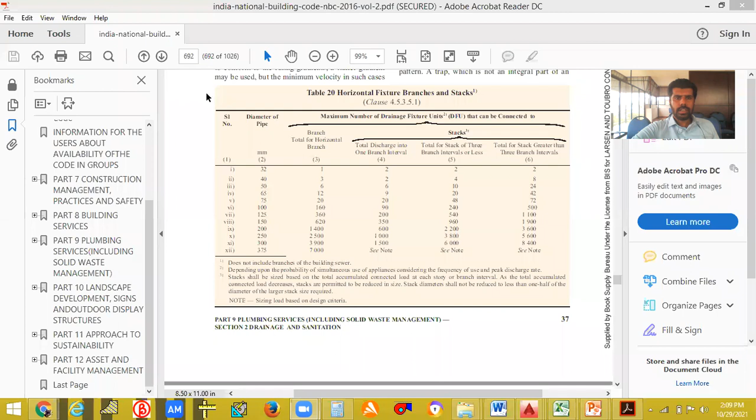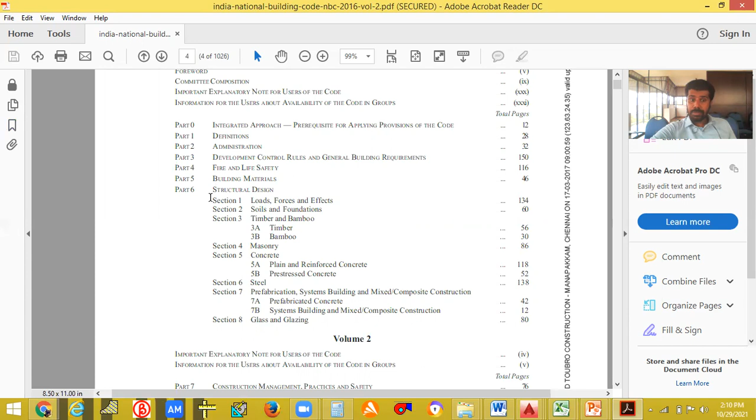So this is the National Building Code of India, 2016. In this, we have different contents in which there are part 1, part 2, part 3. Part 1 has definitions, administration, development control rules. Part 4 comes as fire and safety. Part 5 comes as building materials. Part 6 is structural design. All this comes in NBC only.

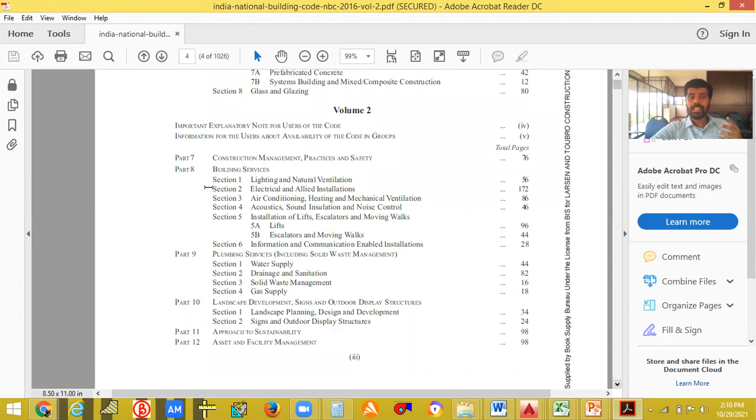Part 7 is the construction management. Part 8 is the building services like lighting, electrical, air conditioning installation. And the plumbing system comes as part 9. So when we are dealing with NSPC, National Standard Plumbing Code, that code is being taken from NBC itself only. You understood what I am saying?

So all this water supply, drainage, solid waste and gas, all those things which come under plumbing services are taken from NBC itself. But when we are dealing with a code particularly for plumbing, we could say NSPC. Not only NSPC, we can use NBC directly, or IPC also. We have already seen 3 different methods for water supply pipe sizing: WSFU method, loading unit method, and Plumbo-Stat method. You can use those methods for finding out the pipe sizes. That won't be rejected, because we are following a rule in India itself.

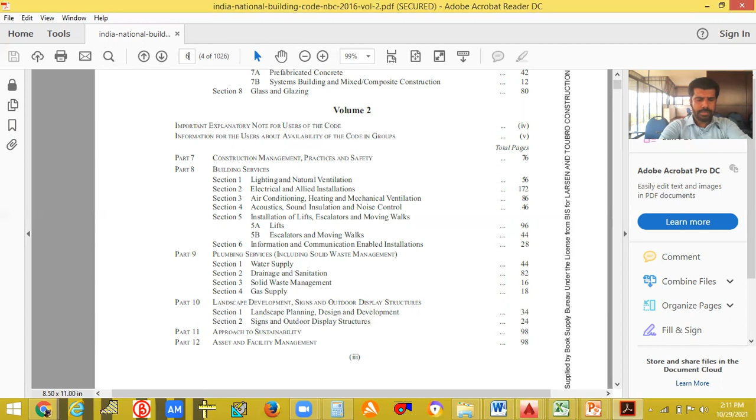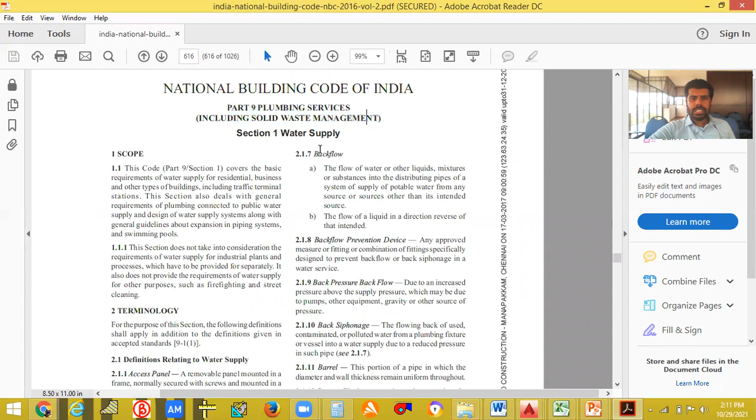And with respect to NBC, the WSFU fixture unit we have taken is directly taken from NBC only. For example, this plumbing service is page number 612, I think. One second. We are doing projects, so we know it. This is the National Building Code of India, plumbing services, water supply, and regarding the WSFU, to let you know that we have taken the correct way for designing.

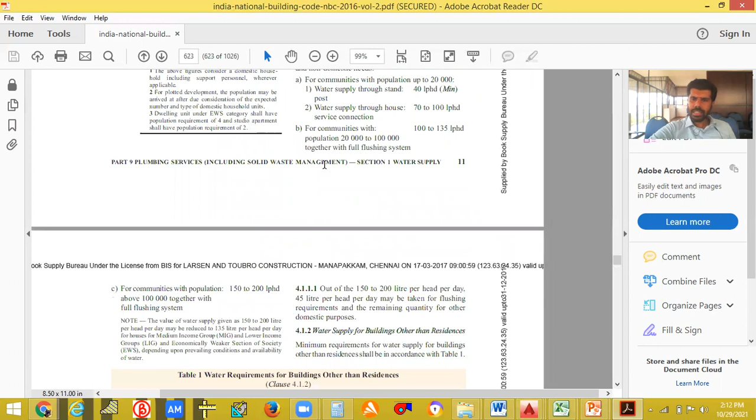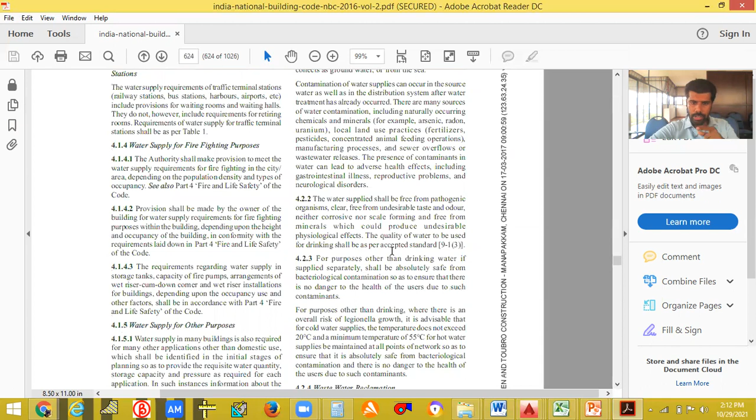Now from here only I have taken that screenshot to show you the water requirements, how many liters per day are used. Residence is not given here, only other than residence. But you can see here for domestic it is 90 liters per day, and for flushing it is 45 liters per head, so total it will be 135. We have taken 100 because it is said here we can take 100. So with respect to this liters per head, we have already calculated the overhead tank capacity.

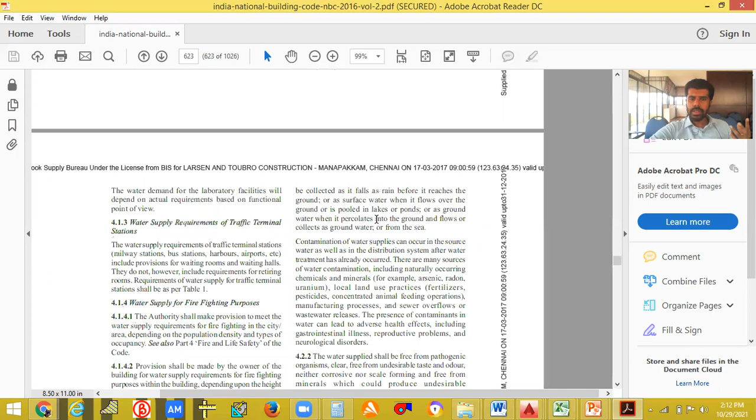Not only that, the WSFU also we have directly taken from this NBC only. And yesterday we have seen a problem regarding the water closets, how many liters is being used by the flush. It's already written here. You can see here, for water closet, the maximum flow rate is 6 liter per flush. Understood? When we are doing that, we will be getting the answer.

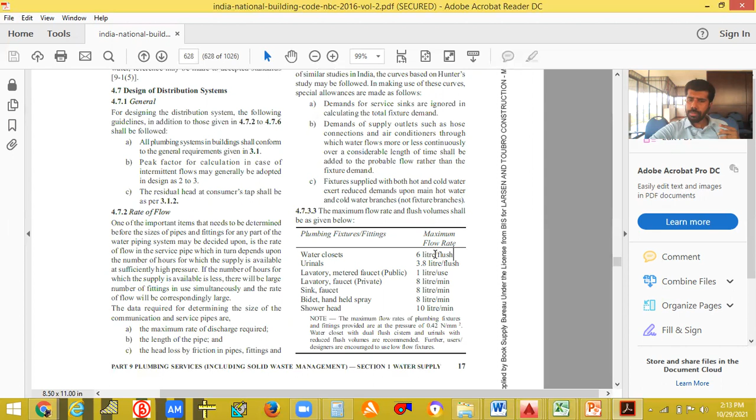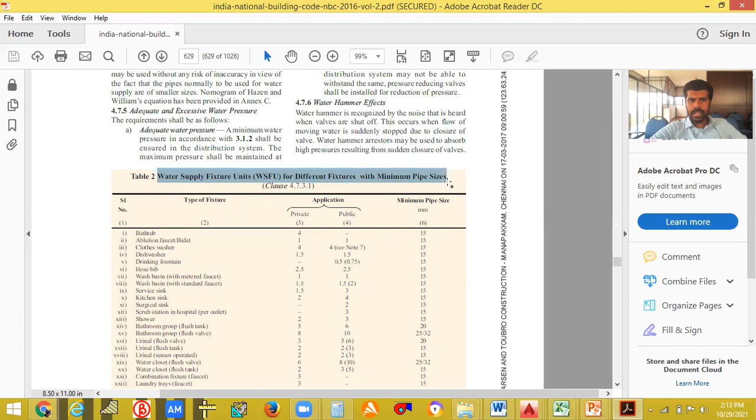And regarding this WSFU, we can see here water supply fixture units, WSFU, for different fixtures with minimum pipe size. This is from NBC only. You can see here bathtub, for a private application, WSFU is 4. We have taken 4, right? And for wash basin and for water closet, you can see we have taken the same WSFU only. So this WSFU only we have calculated and we have found the pipe size.

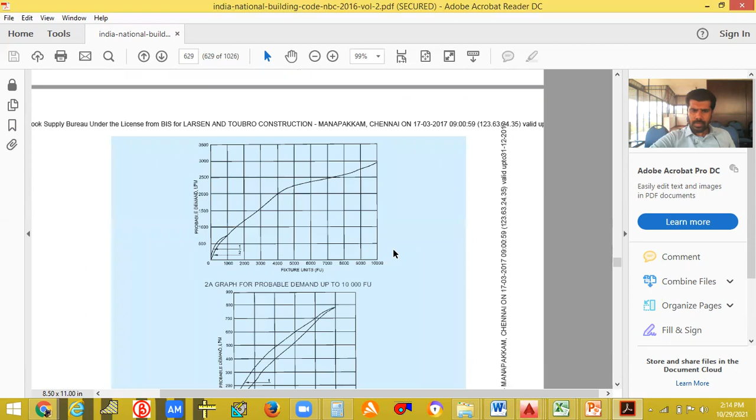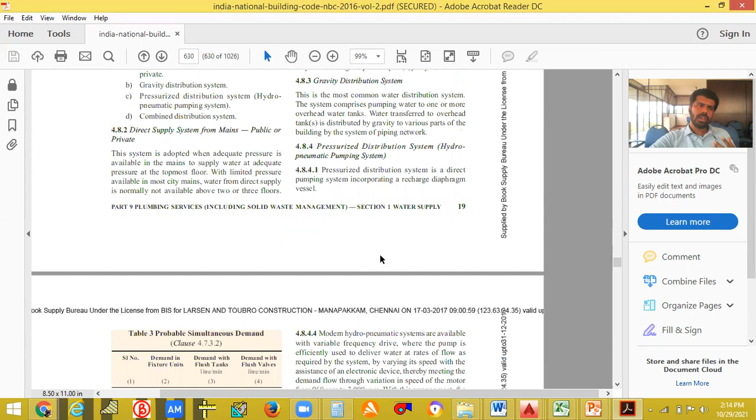And I have already said that the minimum pipe size will be, you can see here, 15 mm. Minimum pipe size given by the NBC is 15 mm, and this 15 mm only we are also doing. So all these things we have taken from that NBC itself only. We are just going with this water supply only. We haven't come into drainage. That's why I have just focused on this water supply.

We can see that WSFU, this chart only we have taken. Water for ablution, it is 1. Clothes washers, it is 4. With respect to this WSFU only, we have found out the GPM. With that GPM only we have found out the pipe sizes. So if you want, we can just compare with the NBC and see what the difference is.

With respect to NBC itself we are moving forward, but it is not necessary that everything should be specified like NBC. You can take NS, you can take ASPE also. You can take NSPC, which means National Standard Plumbing Code. All those things will be taken from these individual standards only. With that respect, we won't reject. So whatever we have done, it is proper. So we have to follow these things, minimum 15.

So I have given this 15 mm pipe size. But in practical sense, the contractors won't give 15 mm. They will directly give 20 mm only, as a safety factor. So as the design, it says for the individual fixtures we have to give a minimum pipe size of 15 mm. As a design, we can give 15 mm also. That's correct. That is fine.

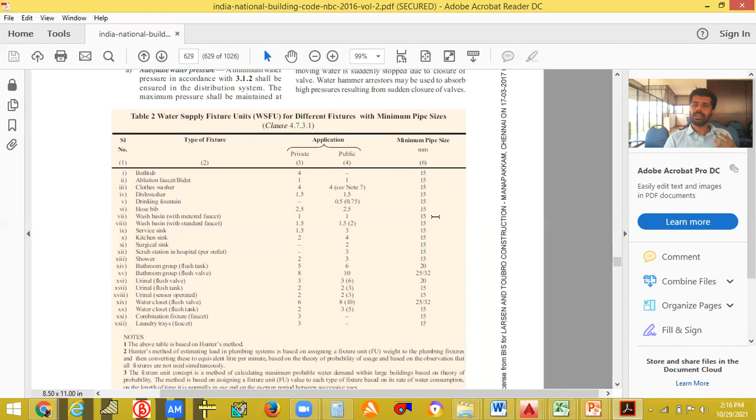Totally fine. But in a practical sense, if as a consultant I am saying you have to give 15 mm only, they will give only 15 mm. But still, as a safety factor, we can give minimum 20 mm. Nowadays, 15 mm is not given as the minimum pipe size. Though 15 mm is required, still we give 20 mm as the minimum pipe size. So all these things are there in the NBC only. This is the NBC chart.

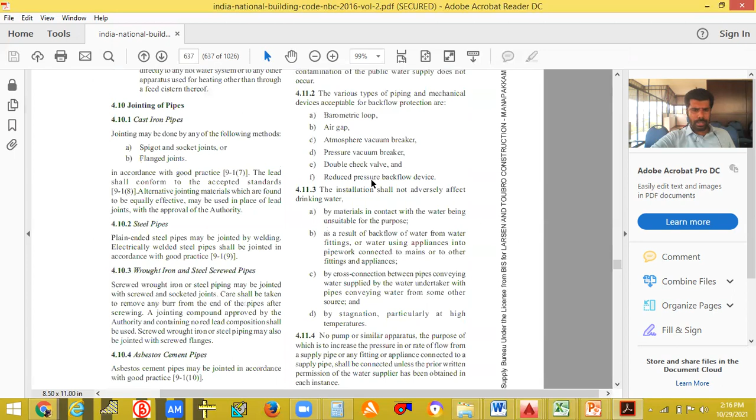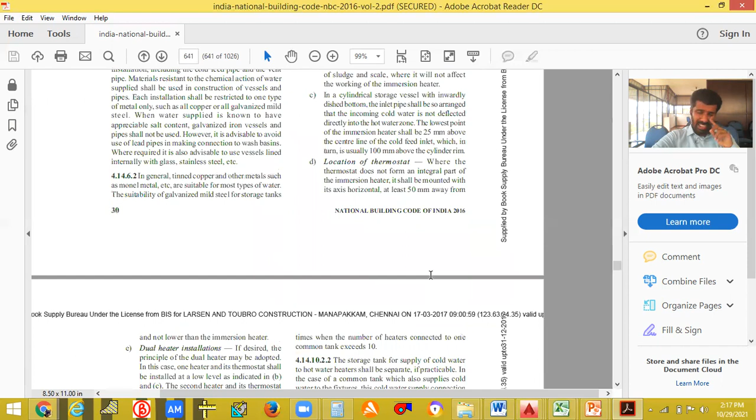Not only that, the point I am trying to say is that all those values and codes will be taken from this NBC itself only. But as a local code, you can name it as NSPC or IPC or something like that, for that particular place. But as a designing part, everything will be perfect only. Otherwise we won't get approval.

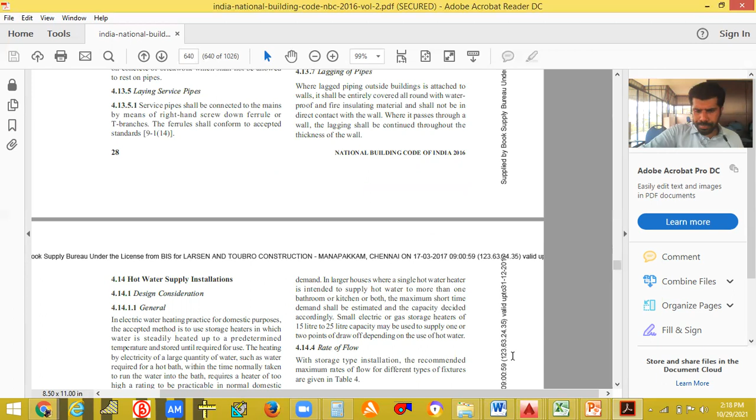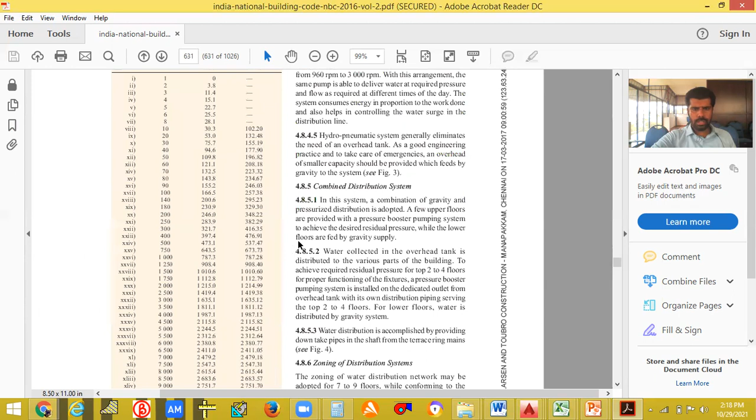So I think it is clear for you, because for this water supply we have taken the same values only. So there won't be any difference. And the minimum pipe size is this much only. So I think that is clear for you.

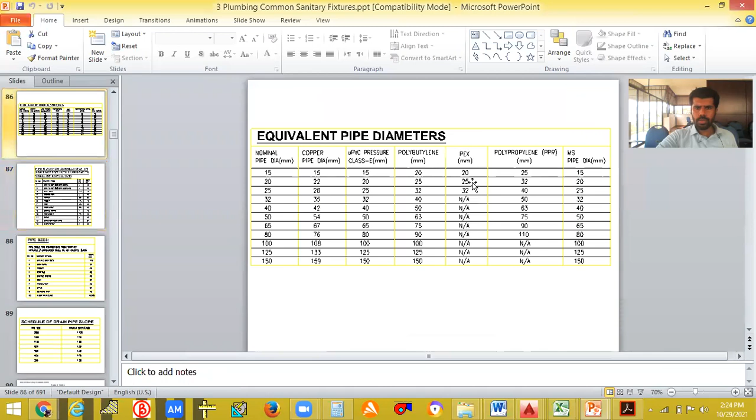I have already taught you about this thing only, so I'll share that once more, coming back to my initial class. Listen properly - this I have already taken in the initial classes, about minimum pipe, equivalent pipe diameters, and all those things.

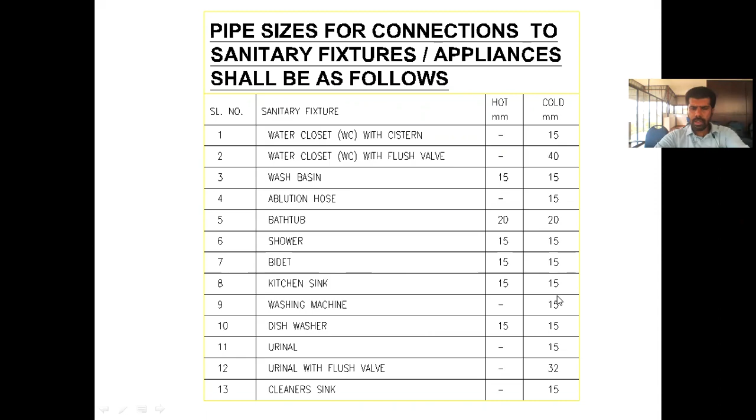This is the water closet minimum pipe diameter shown here. With cistern, it is 15 mm. Wash basin 15 mm, ablution hose 15 mm, bathtub 20, shower 15, bidet 15, kitchen sink 15. So all these things are 15 only - that's what I have already shown you in the NBC. Minimum pipe size is 15, 15, 15.

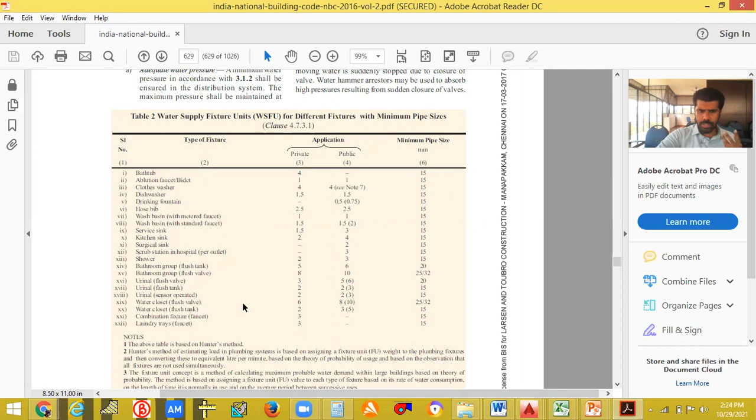When it comes to these, all those things will be 15 only. Water closet will be different depending upon the type - if it's a cistern or a valve, you have to use larger pipe sizes. So there won't be much difference like this, it's just what I have shown you.

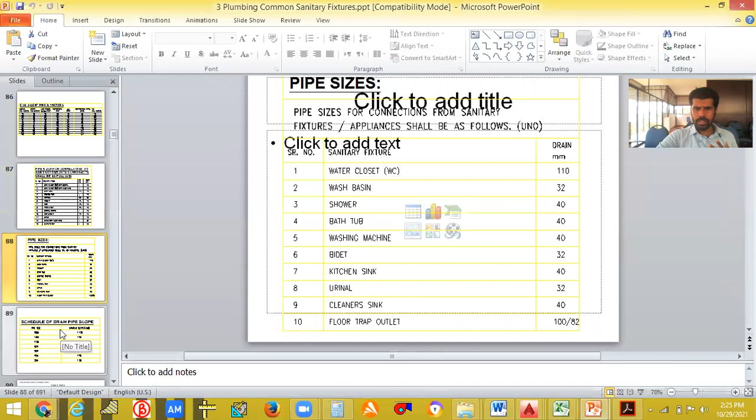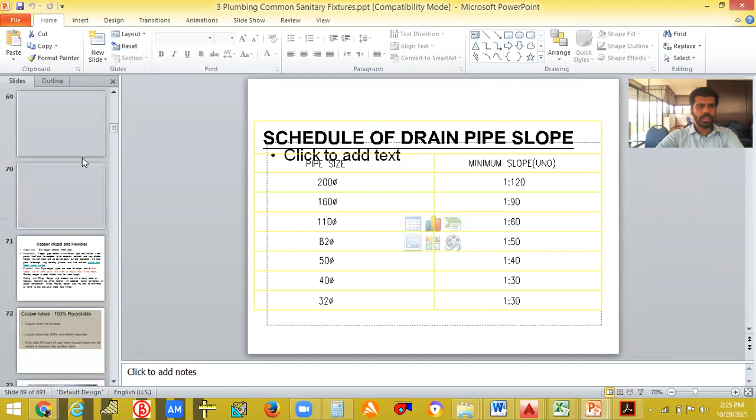And all these things I have shown you - this comes in a drain only. Okay, all these things I have shown you. Now coming to this, this was the pipe diameter we have already taken.

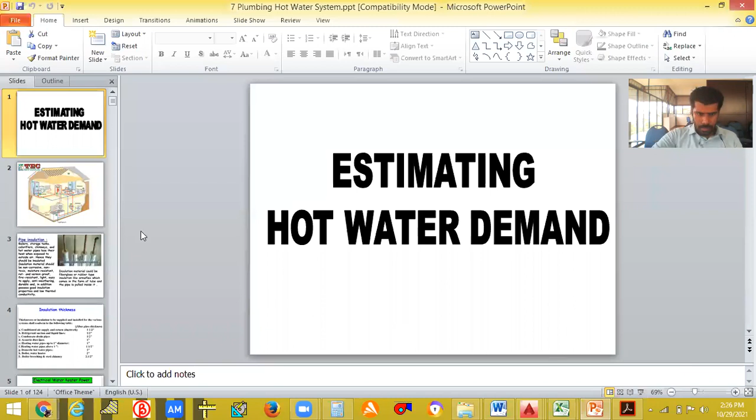So today we are going to deal with hot water system only. I will share my screen regarding the hot water system. In any building, we need hot water as well as cold water. It is mandatory.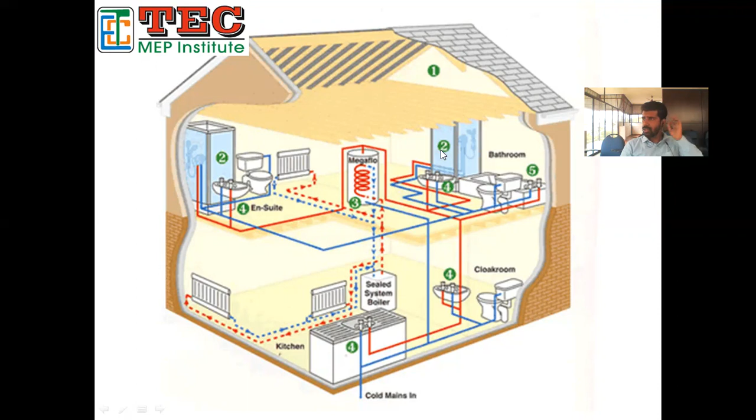So in order to avoid that, if the length is more than the recommended amount, like more than 100 feet, we have to give a recirculation pump so we can maintain hot water continuously throughout that pipe. So insulation is important.

This is generally said: pipe insulation depends upon the insulation itself. Boilers, storage tanks, calorifiers, chimneys, and hot water pipes lose their heat when exposed to outside air, hence they should be insulated. Insulation material should be non-corrosive, non-toxic, moisture-resistant, rot and vermin proof, fire resistant, light, easy to apply, anti-weathering, durable, and in addition possess good insulation properties and low thermal conductivity.

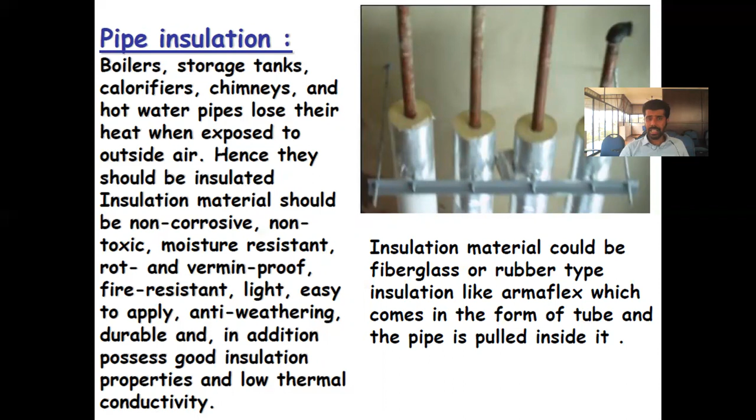So insulation material could be fiberglass or rubber type insulation like Armaflex, which comes in the form of a tube, and the pipe is pulled inside it. Normally the insulation material will be fiberglass or nitrile rubber type insulation, like Armaflex. It's just a general thing.

Let's see a general thickness, how much thickness should be given if you're using fiberglass material. The thickness of insulation to be supplied and installed for the various systems shall conform to the following table. First, for conditioned air supply and return ductwork, you can give 1.5 inch fiberglass thickness material.

For refrigerant suction and liquid piping, you can have half inch. Condensate drain pipe, half inch. Acoustic duct liner, 1 inch. Heating water pipes up to 1 inch diameter, here dealing with heating water pipes, you can have 1 inch. Heating water pipes above 1 inch diameter, 1.5 inch.

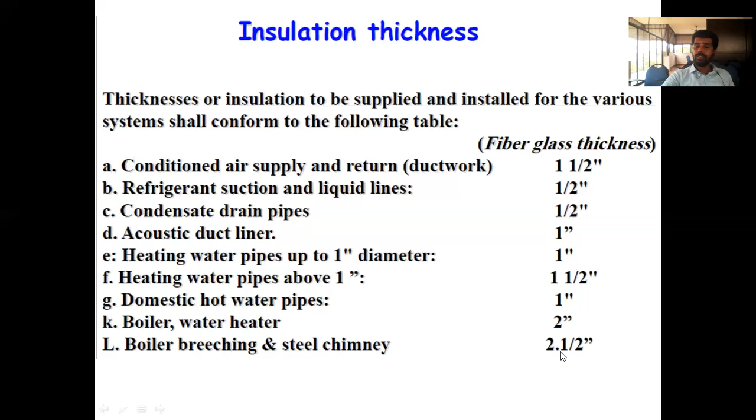And domestic hot water pipes, you can have 1 inch thickness as insulation. For boiler and water heater, you can have 2 inch. For boiler breeching and steel chimney etc., you can have 2.5 inch thickness. These are the general insulation thicknesses.

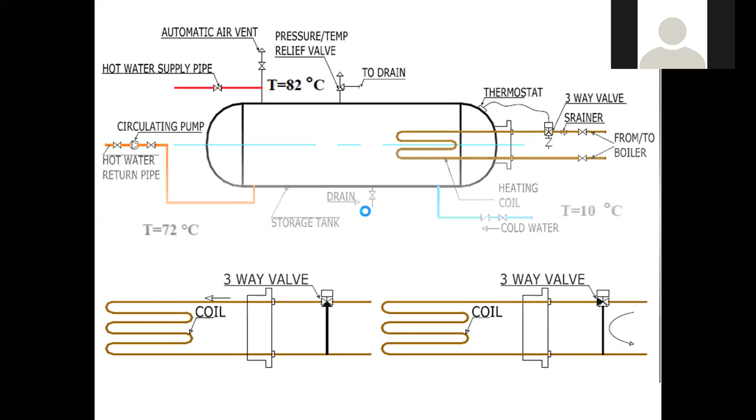Now, hot water system, I am just giving an introduction. Finally, we'll be doing a problem, and by that problem we can know the total water capacity that we need as well as the heating capacity that we need. Coming to the introduction, I am just dictating this because there is nothing much to explain. Since we are dealing with hot water, the main focus for design is to find out the pipe diameter, which we can easily know by using the WSFU method.

And I have already said that the WSFU method will be taking only 75% of the fixture unit. And when coming to the hot water system, we have to find out the heater heating capacity as well as the storage tank capacity. These are the main criteria in the hot water system.

Another concern is to give the recirculation pipe. These are the main things which come in the hot water system, and then we have to do the installations. That is another thing. So anyway, I will detail this introduction.

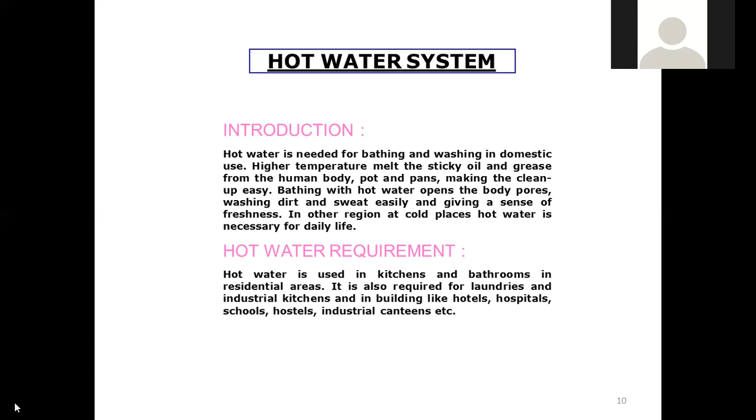So mainly we'll be focusing on the hot water system. What should be our main aim? In residential, mainly three areas we will be using it: the wash basin, the shower, and the kitchen sink. If you are trying to use hot water for washing, we can give one hot water supply for washing the clothes also. That is also needed. These things we have already discussed.

The temperature of the hot water. This I have taken from the NBC only. If you have any doubt, I will just show you. The design of the hot water supply system and its appliances shall be based upon the following temperatures in accordance with IS 755 standard. Scalding 65 degrees; it shows different temperature ranges. I will just show you from the NBC itself.

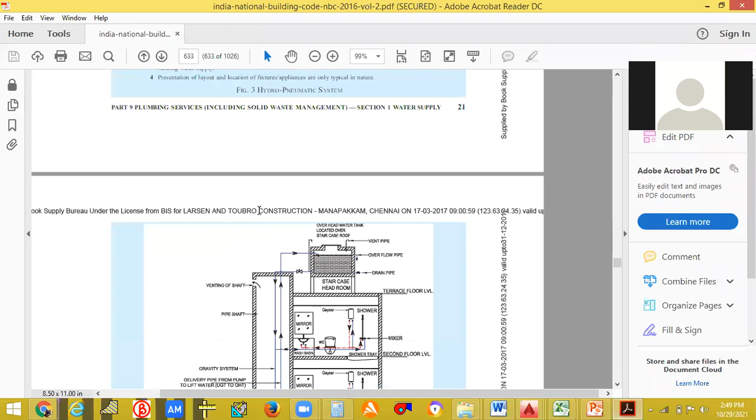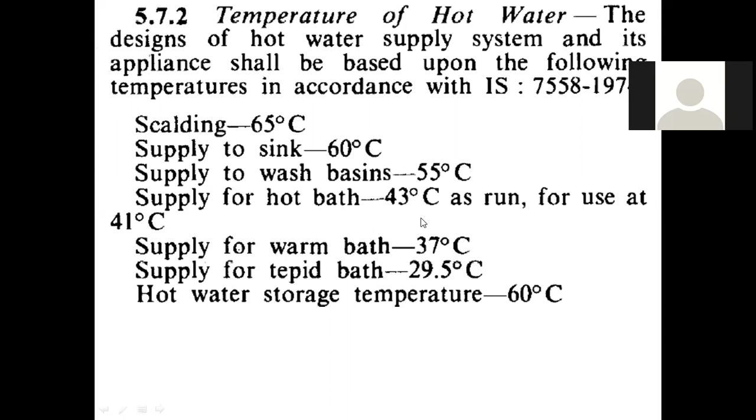Now, systems of hot water supply. There are two systems of hot water supply: the instantaneous system and the storage system. Normally, there are two types of heaters or two systems. One will be the instantaneous system, and the other will be the storage system. So, as a designer, where to give storage and where to give the instantaneous system, that we can see.

In the instantaneous system, the water is heated at the moment it is needed. That's why it is called instantaneous. If you want hot water right now, you can use the instantaneous system, and you will be getting hot water instantly without waiting. At the moment it is needed means when you need hot water, at that time it will start to heat it.

In the storage system, a tank full of hot water is maintained in readiness. The hot water will always be stored, so when you open the valve, within seconds you'll be getting hot water, because it is already stored inside. But in the instantaneous system, it heats when you need it. So depending upon one thing, instantaneous would be better.

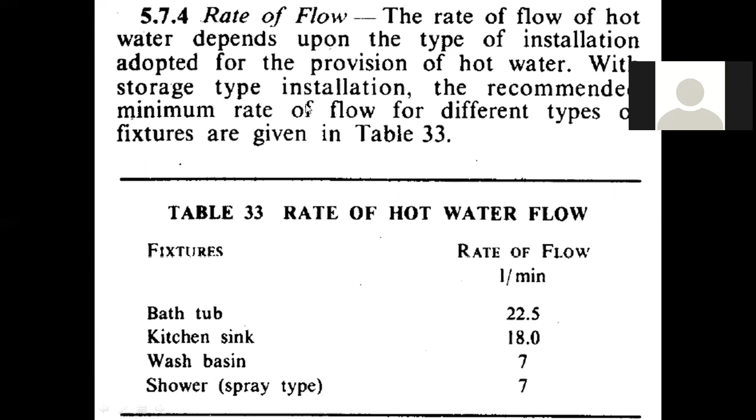So this is given. Bathtub, it is 22.5 liters per minute, kitchen sink 18, wash basin 7, shower 7. In that case, we have seen 5 only. Now here it is shown as 18. 5.7.4. So here it is given as with the storage type installation, the recommended maximum rates of flow on different types of fixtures are given in table 4. Now it has been reduced to this much, so it might be the minimum one.

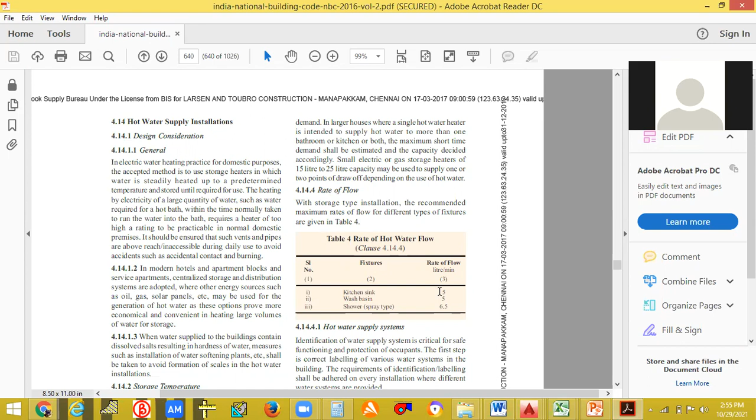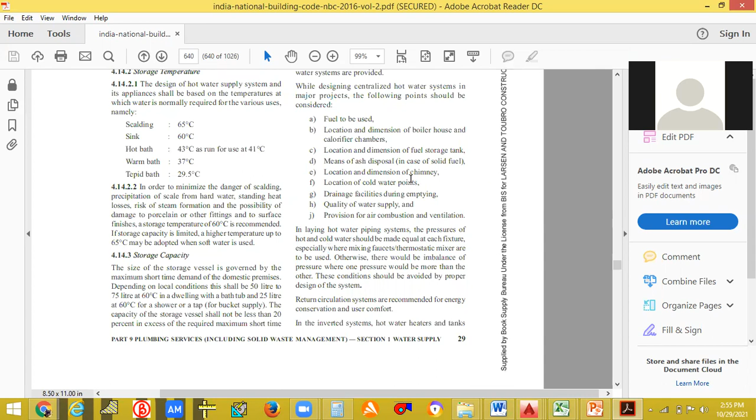5, 5, 5. I have seen showers need something like 7 to 10 liters per minute, 6.5. They have written as 7. So if you are choosing NBC, if you are choosing 5 also, it's acceptable, and all these things are taken from this itself. But it is a minimum flow rate. Kitchen sink it is 5, wash basin 5, shower 6.5. If you are taking larger values as a safety, you can keep that. That's all about the rate of hot water.

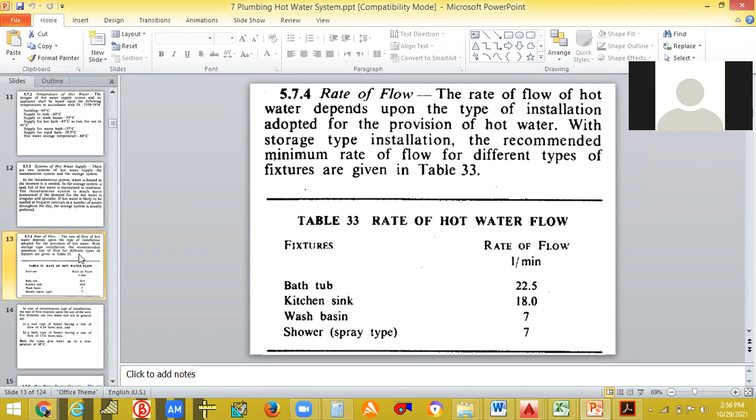Now, here we were dealing with the rate of hot water depending upon the storage type installation. In case of an instantaneous type of installation, the rate of flow depends upon the size of the unit. So it will differ according to the size of the unit. For domestic use, 2 main sizes are in general use.

One is a sink type of heater having a rate of 4.54, which is coming closer to 5 liters per minute, and the bath type heater having a rate of 13.6 liters per minute. If you are using the instantaneous type, you have to follow this one. Both the types give water up to a temperature of 60 degrees Celsius. So normally that will be the temperature.

Now hot water storage capacity. The size of the storage vessel is governed by the maximum short time demand of the domestic or industrial premises. Depending on the local condition, this shall be 50 to 75 liters, which means that the hot water storage capacity depends upon the demand of the water for domestic purposes.

So depending on the local conditions, this shall be 50 to 75 liters at 60 degrees Celsius in a dwelling with a bathtub, and 25 liters at 60 degrees Celsius for a shower, or a tap for a bucket supply.

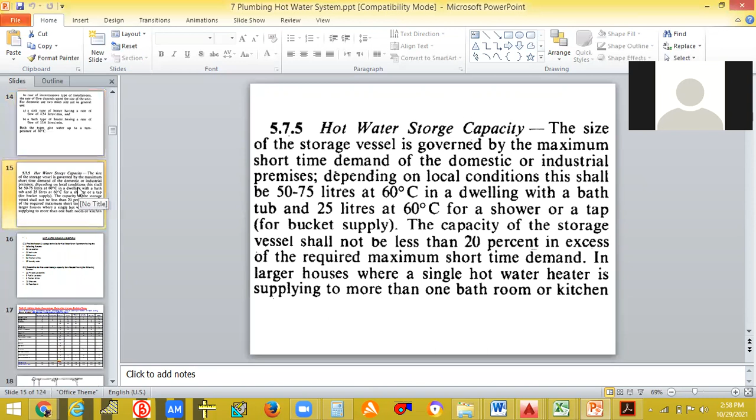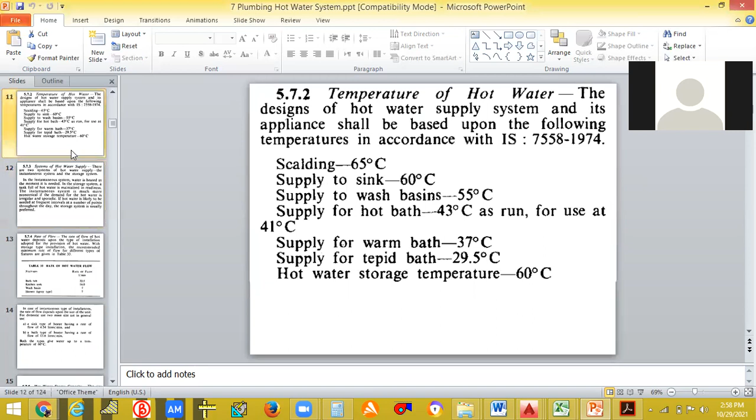Okay, so we have already studied about the hot water capacity. Now we will be dealing with how to find out the hot water tank capacity. Okay, so we'll be finding out the hot water capacity by a problem. Okay, a question. So this is the first question, and I think you have to just come with me. Okay, there are two questions. We can just deal with this first question. The two questions are similar, but the numbers are different.

Okay, so find the heater and the storage tank size. So basically we need these two only. Find the heater and storage tank size for hot water for an apartment having the following fixtures. So here we are trying to deal with the ASPE code only. We are trying to find out the heater capacities. Okay, it doesn't make much difference in the capacity with these two different codes.

Let's see. Find the heater and storage tank size for hot water for an apartment having 60 lavatories, 30 bathtubs, 30 showers, 60 sinks, and 15 laundry tubs. So these are the different fixtures, and you have to find out what storage tank capacity you need for this apartment. And not only storage tank size, you have to find out the heater capacity also. How much kilowatt?

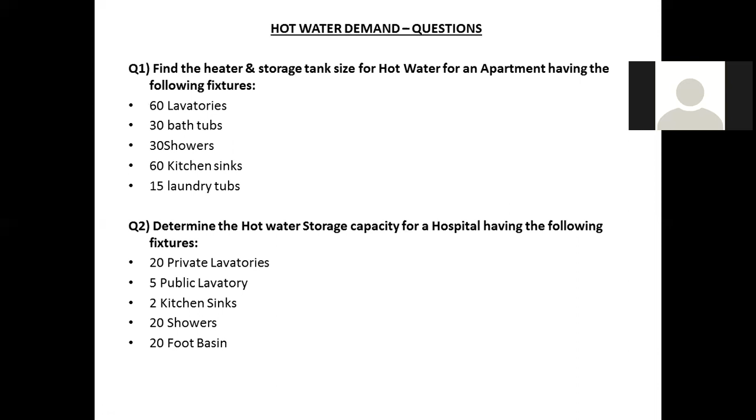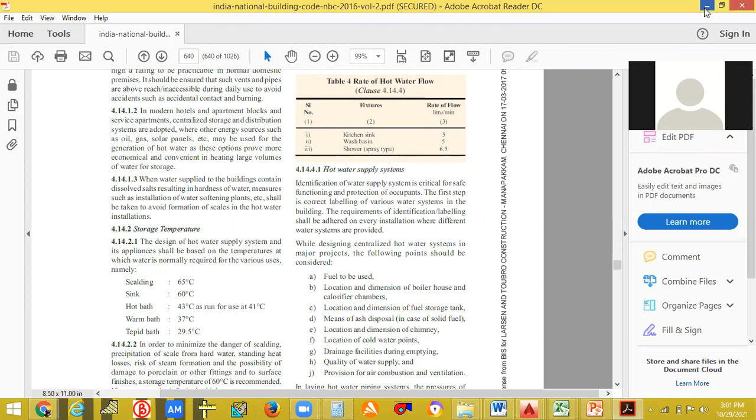Okay, so for finding out the storage tank capacity, first we need to know the flow through fixtures, how many gallons per hour. If you know NBC, you can take it from NBC. Kitchen sink, wash basin, shower are given there in liters per minute only. So here we have to convert it into gallons per hour. That is the way we are going to find out the answer.

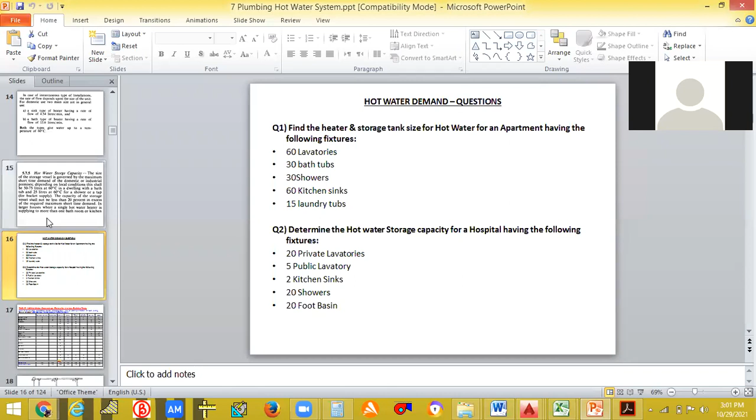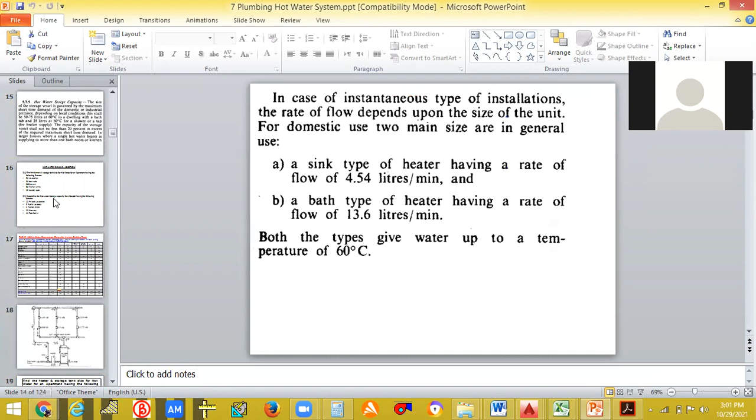Okay, let me see. Now we are going to find out the hot water by the help of ASPE only, the American Society of Plumbing Engineers. By that code we are going to find out the hot water capacity. Okay, so this is the question. Find the heater and the storage tank size of hot water for an apartment having 60 lavatories, 30 bathtubs, 30 showers, 60 sinks, and 15 laundry tubs.

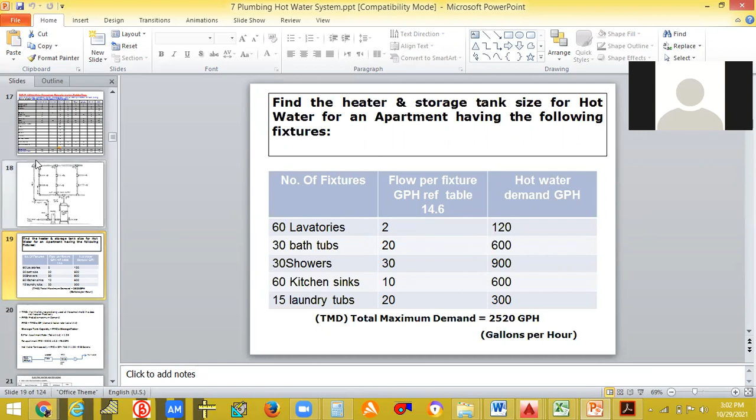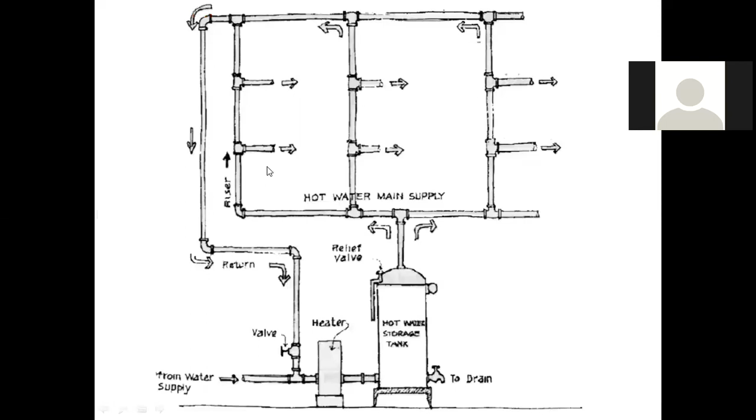So how much will be the hot water demand for 60 lavatories? It will be 60 into 2, this is 120. 30 into 20, 600. 30 into 30, 900. 60 into 10, 600. 15 into 20, 300. So total maximum demand is 2520 GPH, which means 2520 gallons per hour, if all these are working at a single time.

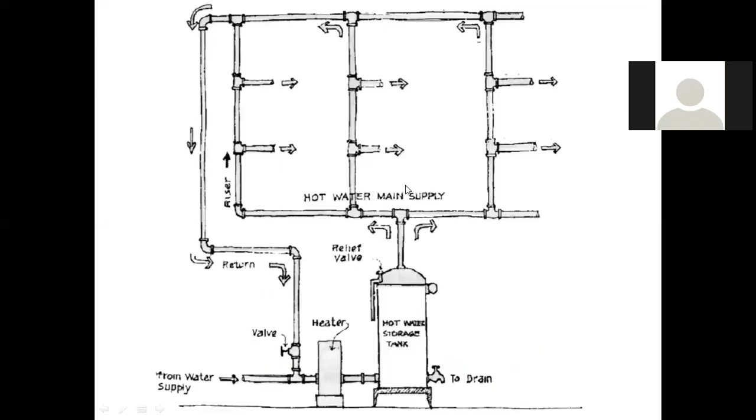In order to know the storage tank capacity, you have to multiply this PMD, probable maximum demand, with the storage factor. The storage factor from the same table is 1.25. Multiply with the storage factor and you will get the storage tank capacity, so how many liters or gallons of tank is needed.

So let's move forward with this question. Total maximum demand we got as 2,520. To find PMD, 2,520 into DF. Demand factor is how much? 0.3. So 2520 into 0.3 is 756 gallons per hour.

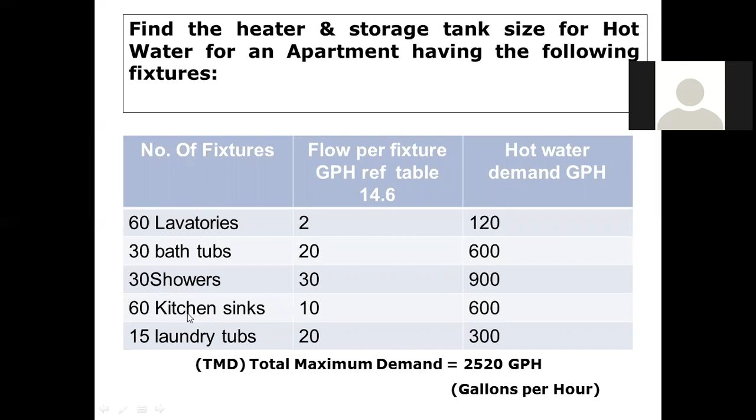So you got PMD. To find the storage tank capacity, multiply this PMD with the storage factor, 1.25, and you'll be getting 945 gallons. So the heater tank capacity for this question, with 60 lavatories, 30 bathtubs, 30 showers, 60 kitchen sinks, and 15 laundry tubs, is 945 gallons storage tank.

Now, in order to find out the heater capacity, you have a formula. Just write it down. Q is equal to water heater capacity. We have seen it just before.

So this is the way to find out the power, or the water heater capacity. I will show you another formula, an easy formula, same thing only. MCP delta T, we have already seen somewhere I think. MCP delta T divided by time into efficiency. Same thing, MCP, instead of kilogram, it is written as mass flow rate only. MCP delta T divided by time into efficiency. By using this formula, same formula only.

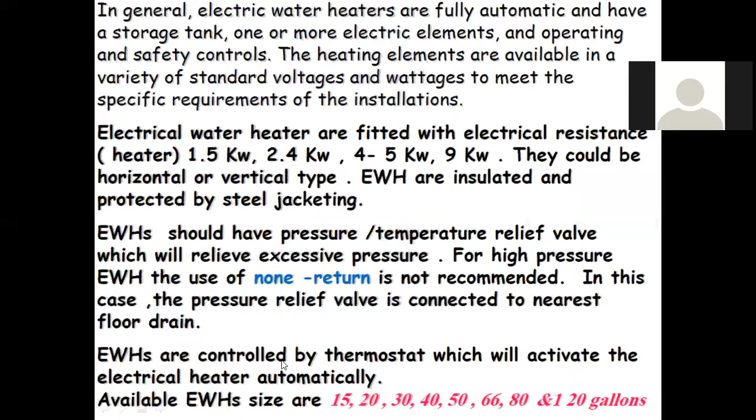MCP, mass flow rate, okay? MCP, which means specific heat only. M means specific heat only. Sorry, M means mass flow or the amount, the kilogram, and CP is the specific heat, and delta T is the temperature difference, and time and efficiency. So can you find the answer for this?

CP is equal to 4.2. Just note it down. CP equal to 4.2 kilojoule divided by kilogram degree Celsius. Delta T you can write as, let it go from 15 degrees Celsius to 60 degrees Celsius.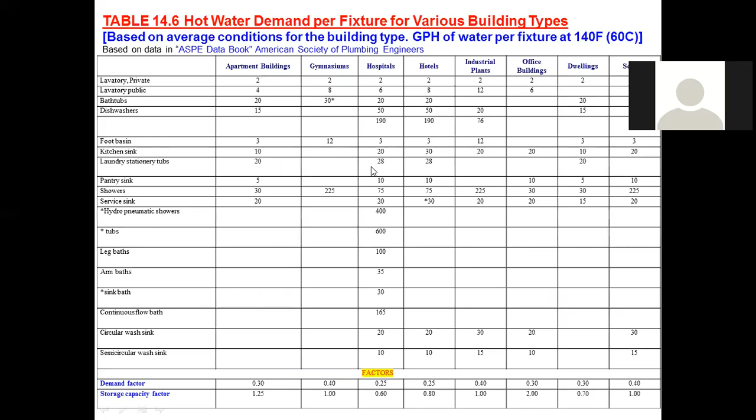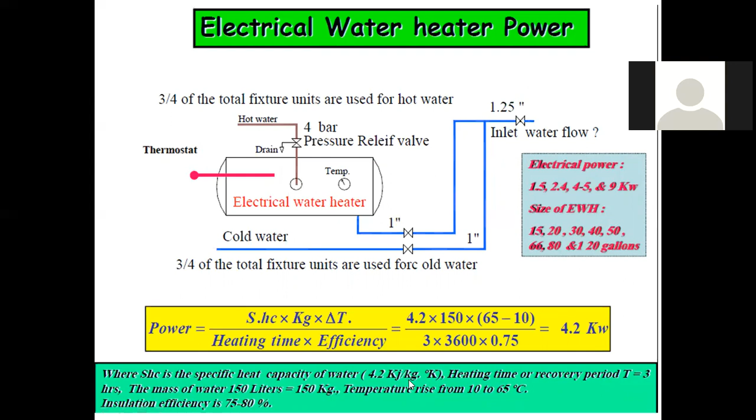Here we have seen the temperature going from 10 to 65, right? So for this particular question, the temperature rise, let it be 15 to 60. So the temperature difference will be 45, correct? 15 to 60, temperature difference will be 45.

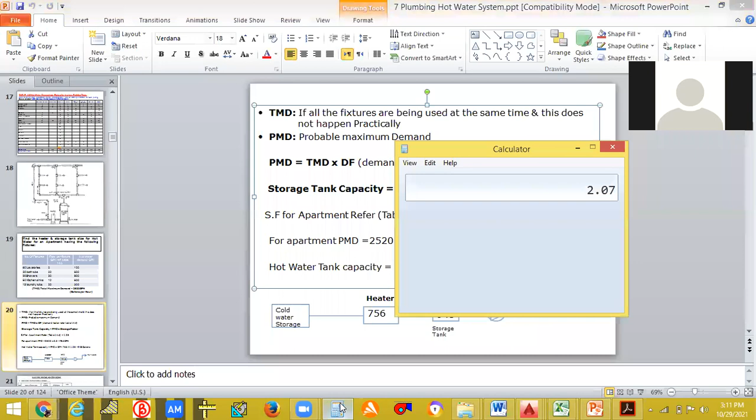So the formula is MCP delta T divided by time into efficiency, in which M you already know it, right? It is 756 gallons only. That is the mass flow, gallons per hour. So what you have to do is, the formula is MCP delta T.

So MCP delta T. CP you already know it, it is 4.2. Delta T now you know it, it is from 15 to 60, so the difference will be 45. And the efficiency you can take as 75%. You can divide by 0.75.

You need to know what else you need, you want only the mass flow rate. Mass flow, it is already given as 756 gallons per hour. You have to convert that gallons per hour to liter per second or kilogram per second.

756 gallons per hour, if you convert it into liter per second or kilogram per second, what will you do? You know 1 gallon is equal to 3.785 liters. So it will be 2861.46 liters. So that you have to convert to liter per hour only.

2861.46 liter per hour, that you have to convert into seconds. You have to convert to liter per seconds. So in order to convert to liter per second, how much will it be? Divided by 60 into 60.

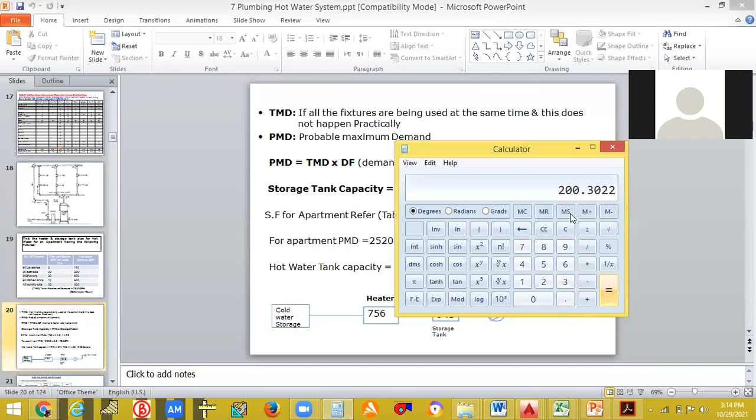So you will be getting 200 kilowatt. So 200 kilowatt is the heater capacity. So you got the heater capacity as well as the storage tank capacity, 945 gallons, and the heater is 200 kilowatt.

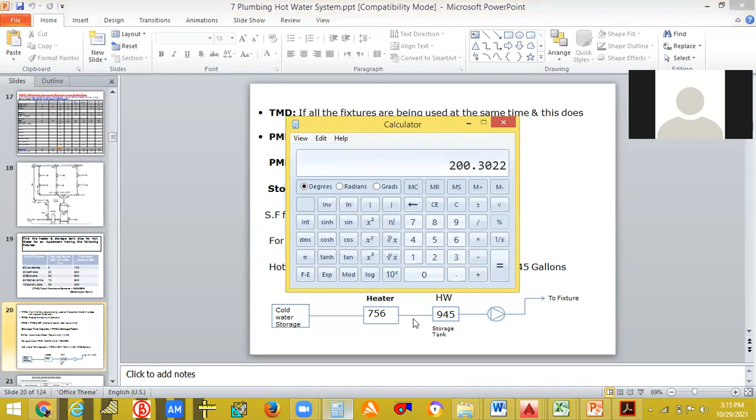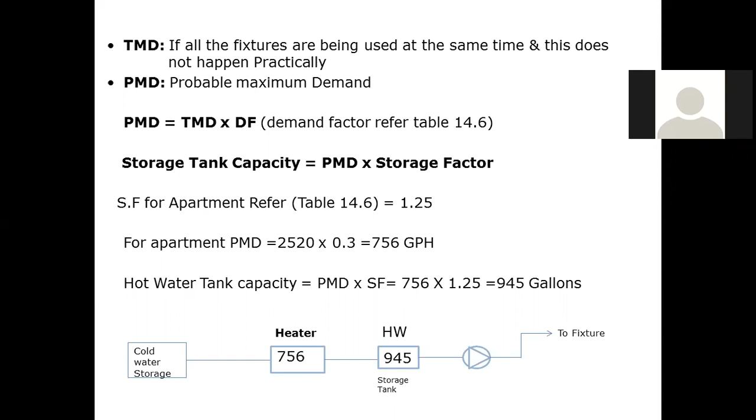So this is the way to find out the answer, the storage water tank capacity, as well as the heater capacity. You could get it from this equation. I think you have understood this.

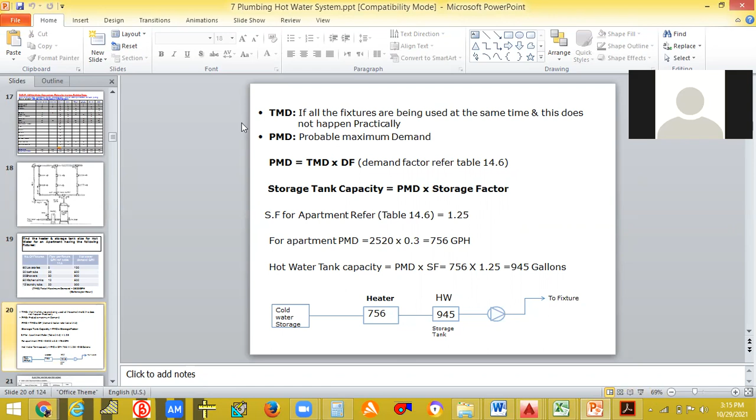Is there anything else? One more thing, I have already said that you need a recirculation system. This recirculation is used generally in buildings for more than 4 stories in height. So hot water recirculation system is used generally in buildings more than 4 stories in height, you have to keep this in mind.

We use a hot water recirculation system if the length of hot water piping exceeds 100 feet, measured from the hot water heater to the furthest fixture. So when can we give this hot water recirculation system? If the length exceeds 100 feet, or if the building is generally more than 4 stories in height.

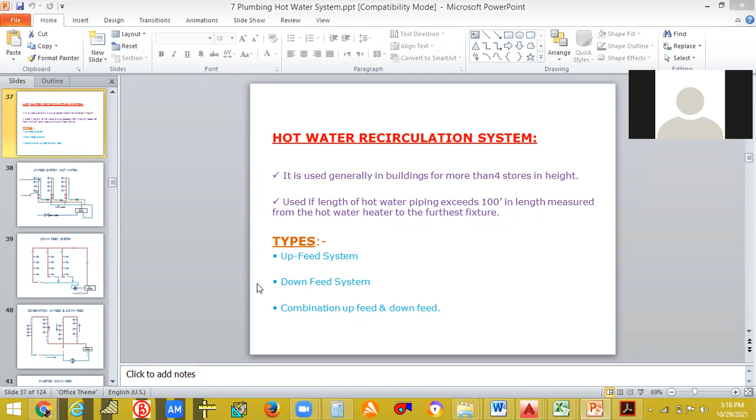So there are different types of systems to give hot water: upfeed system, downfeed system, or a combination of upfeed and downfeed. Let's see what that is. It's just the way of giving the hot water recirculation system.

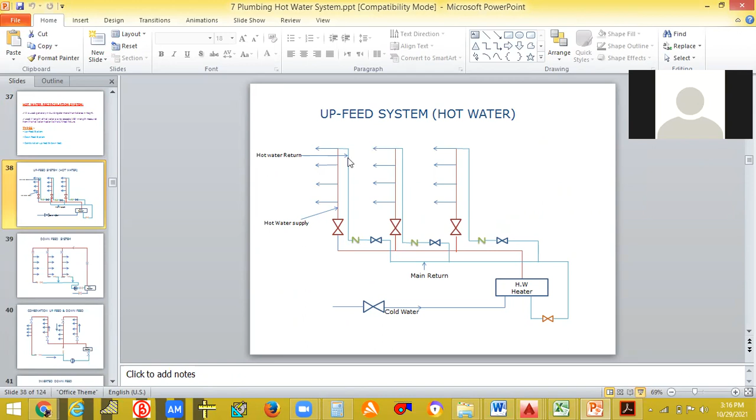In the upfeed system, hot water goes from the heater, and there are 3 different valves. It will be supplied individually to the different fixtures, and from there water will be circulated. You can see here there will be a non-return valve, and from this connection the water will be recirculated and given back to the heater.

One line will be taken individually from the outlet and given back to the main line, and that main line goes back to the water heater. So this circulation will be like a closed loop. That is called the upfeed system - it is going upfeed. This is the hot water supply, this is the hot water return.

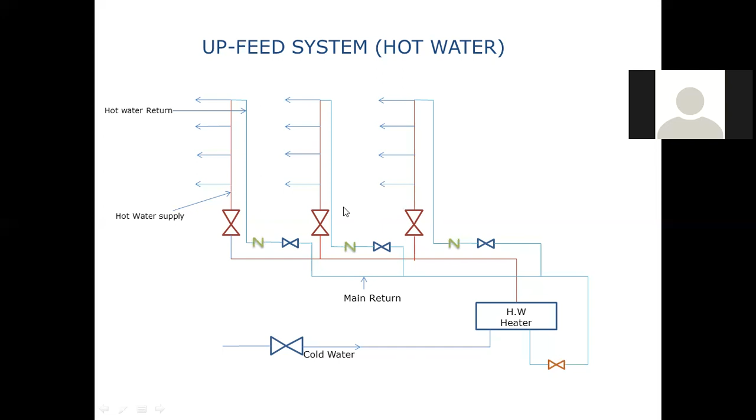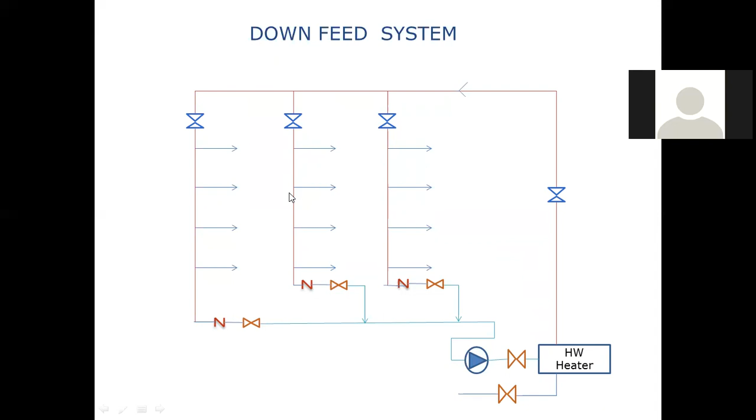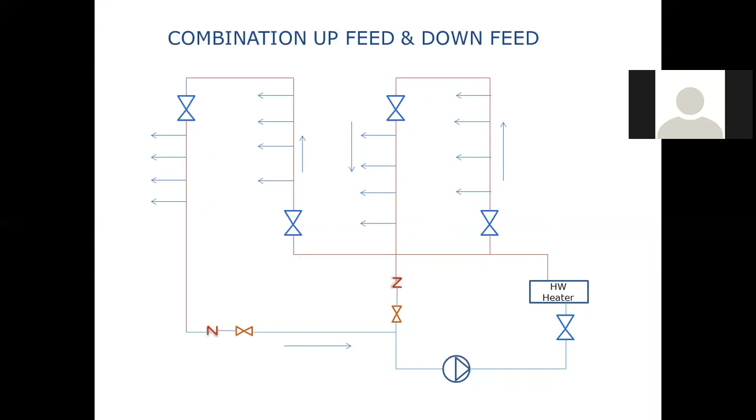Depending upon the site conditions, we have studied the hot water system, and the main thing to take from any code is the maximum flow rate. It will depend - you can take it from NBC or any other codes, but there won't be much difference, because it will change depending upon different fixtures.

As I already said, usually it will be 7 liters per minute, but it can go more than 7 liters also. If you are using rain showers, it may go even up to 50 liters per minute. So as a common practice, you can take 7 or 6 liters depending on the source, and size the heater accordingly to find out the capacity.

Then depending on other factors, we choose whether we want an instantaneous type heater, a storage type, or a solar heater. Then comes the recirculation, and when to do the recirculation - that comes next. So that's all about the hot water system.